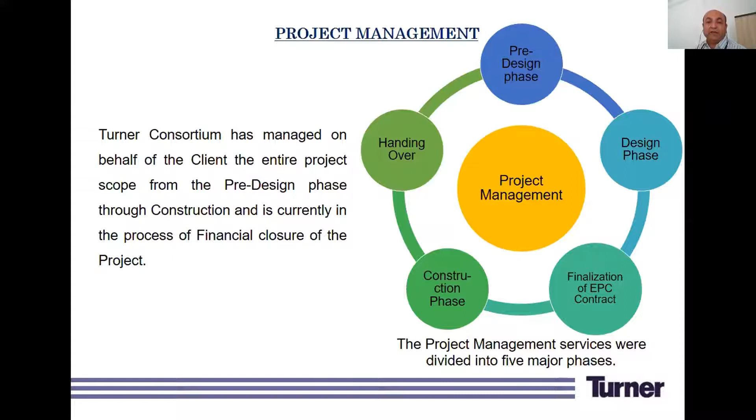Now, this was the general introduction. Let us start the discussion on Statue of Unity.

This was the stakeholders and general arrangement for the project. The government constituted a trust named Sardar Vallabhbhai Rashtriya Ekta Trust, who was the client or owner of the project. Since Sardar Sarovar Narmada Nigam Limited had a setup at Kevadia, the Trust employed them as an employer. After their employment, we worked as the engineer's representative. Turner has worked along with Michael Graves and Associate USA and Meinhardt India Private Limited.

So Turner worked in a consortium. Meinhardt specialized in services, while Michael Graves specialized in architectural design. In this consortium, Turner started this project, and after completing the tendering process, we appointed Larsen and Toubro as the contractor.

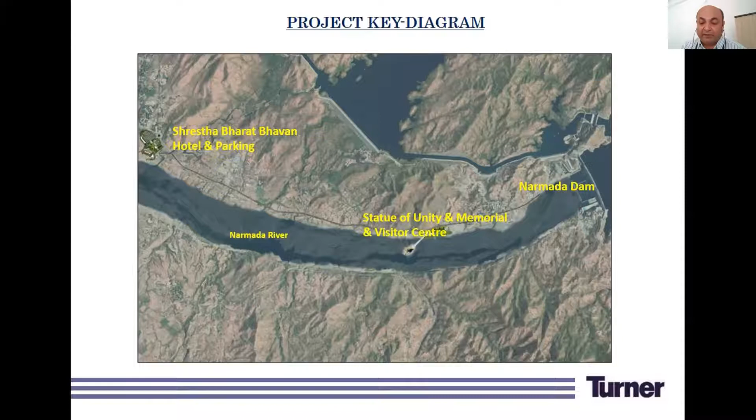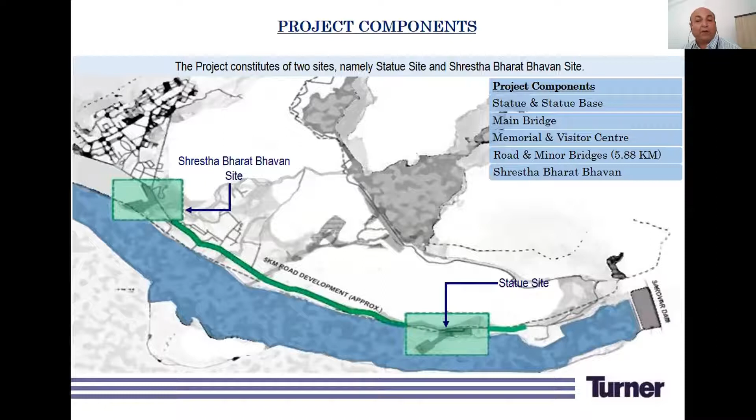This is once again the same arrangement. We have the statue base, main bridge, and memorial and visitor center at one place, and Shrestha Bharat Bhavan or hotel at another place, with a road connecting these two places being part of our scope for phase 1 construction.

The statue is 182 meters, equivalent to 597 feet tall. If we consider the levels, the deck level of the bridge is at 58 meters, the top of the museum or statue base is at 83 meters. Our podium or museum is 25 meters high, and the figure of Sardar Patel itself is 157 meters. If you total all together, that comes to 182 meters.

You will definitely love to know the history behind this 182 meters. Our current Prime Minister, who was Chief Minister at that time, Mr. Narendra Modi, decided on this figure because Gujarat has 182 constituencies. Behind this number, the number of constituencies was somewhere in our Honorable Prime Minister's mind.

To make this Statue of Unity happen, we cast bronze cladding of 21,099 square meters, which had a thickness of 8 millimeters. If you calculate the weight, that is around 1,900 metric tons of bronze used in this statue.

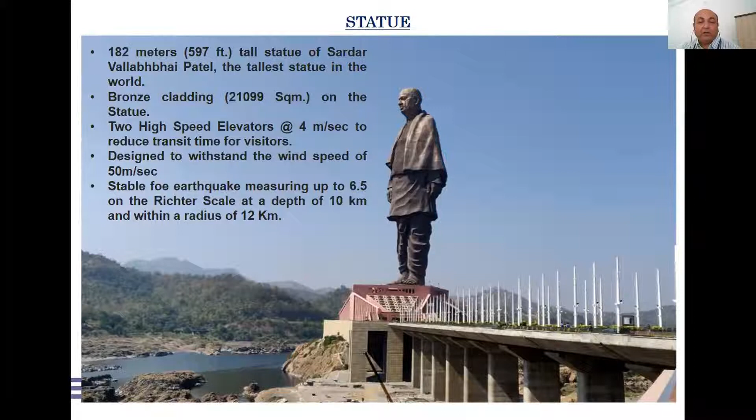Further, the Narmada river, right from Amarkantak to Bharuch, flows between two mountain ranges, one Satpura and the other Vindhyachal. Between these two ranges, we definitely feel a wind tunnel effect, so the structure design must be capable of taking a particular wind speed. I already mentioned we considered 50 meters per second wind load, but that was after we completed the wind tunnel test. RWDI, a consultant based in Canada, did the complete modeling, tested the wind tunnel effect, and suggested going for 50 meters per second wind speed. So the statue was designed at that wind speed.

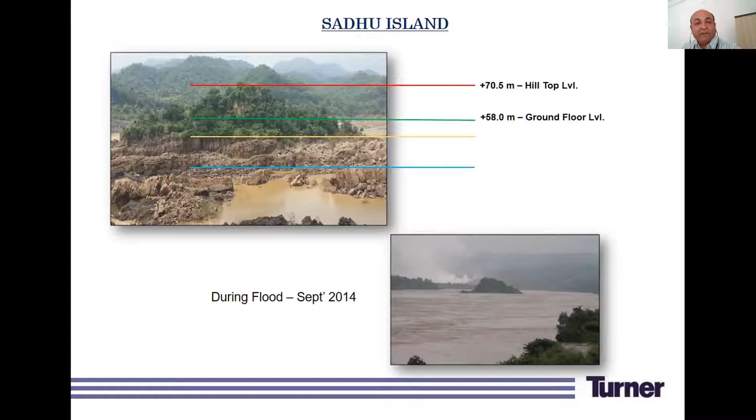Second, as seen in this photograph, in between the river we didn't have space to store material. That was another challenge, because this hillock is almost 300 meters inside the river bank, so transporting material 300 meters inside was a challenge. The second challenge was storing the material, because at that place we did not have any plain area available for storage.

Getting the required area for the museum was also a challenge, because after lowering the island from 70.5 meters to 58 meters, we got almost 62% of our area requirement. So we did huge mass concreting around the hillock and created additional area to place the museum, which is around 7,500 square meters. We created almost 2,400 to 2,500 square meters of additional area by doing CLSM, lean concrete of 0.75 MPa strength, to place the museum. That was another challenge.

As we know, this was the first project of its kind, never designed, never constructed before. So that was another challenge for us, to complete the design as per required codes and standards, keeping safety and fire hazards in mind. We took help from many consultants and experts to complete the design, review and vetting, and we did the design with their help.

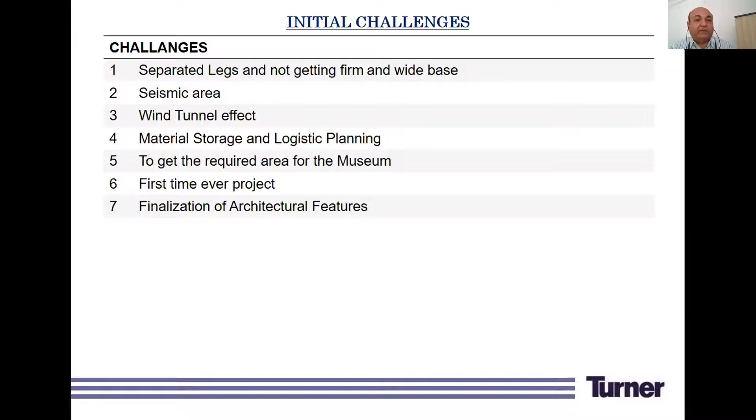A black statue is there at the Ahmedabad airport. So we decided to go with that, with a walking stance of Sardar Patel, to show a little dynamism, because Sardar Patel was a dynamic personality, and to give proper justice to his personality, we decided to go with that particular stance.

Now, to complete this, the government gave us a few governing decisions. We just discussed the walking stance. We also discussed using 8 mm thick bronze as cladding material. Based on wind force and structural calculations, our experts decided that bronze plate below 8 mm thickness would not be sufficient. So we need a minimum 8 mm thick bronze panel to withstand the wind pressure as well as structural forces. So we decided on a minimum 8 mm thick bronze as the cladding material.

Then the third decision was that international standards of foundation, structure, fire egress, vertical transportation, etc. had to be met. As I said, this project was being done for the very first time, so it was found that for some items we did not have codes or standards available in India. In that case, we decided to go with international standards, since fire egress, vertical transportation, and structural design are very important aspects of any structure. So we decided to go with international standards for this particular structure.

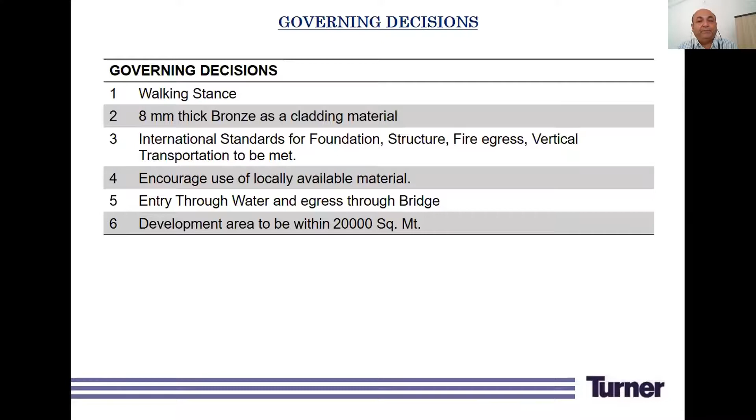Now, we designed the tender document in such a way that we asked for the contract, and asked for the help of all these consultants to be appointed by the EPC contractor, so that we would have expertise available, because this project was being done for the very first time.

We had hydrological consultant, infrastructure consultant, landscape consultant, interior designer, lighting consultant, acoustic consultant, traffic and parking design consultant, life safety consultant, specialist area calculation consultant, pedestrian movement consultant, BMU consultant, audiovisual consultant, security consultant, kitchen consultant, exhibit consultant, and wind tunnel consultant.

This 16 number of consultants we provided in the tender, and after coming on board, L&T appointed all these consultants as a minimum. Over and above this, there were also a few consultants appointed by the contractor, and we will show that at a later stage when that stage comes.

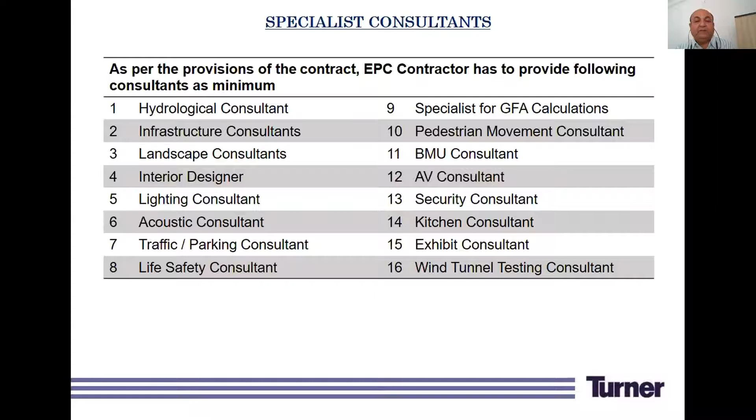First step was to finalize the statue aesthetics. So the government decided that the walking stance of Sardar Patel at an airport should be considered, and the age to be considered is around 62.

So we did a 3D scan of that particular statue to finalize the architectural features of Sardar Patel. After L&T came on board, they did the scanning of the complete statue at the International Airport, Ahmedabad, and prepared a 12-foot high fiberglass statue, which they put up for public consultation at Bardoli.

So we invited all the people, including a few who had accompanied Sardar Patel during his life. They visited Sardar Patel's place, Bardoli, saw that statue, and gave their input. After incorporating the inputs, we finalized one figure that was again scanned, and with the help of different software, we prepared a 3D model of this particular project. After that model, we also did mock-ups of some of the body parts.

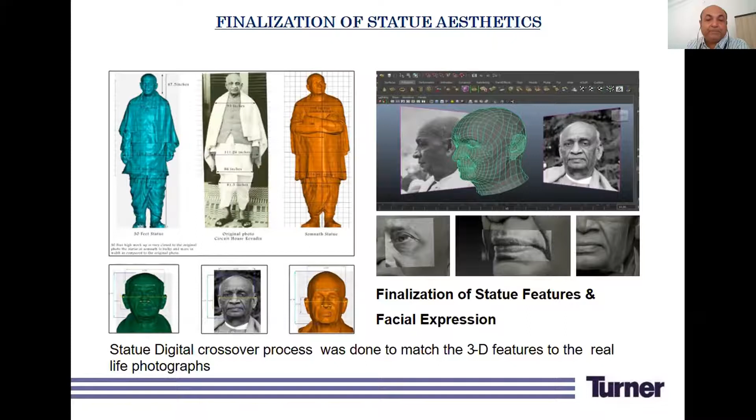This is the same which we have seen in the museum, and these are the process. From 3 foot, we have enlarged it to 18 feet. From 18 foot, it is again enlarged to 30 feet. And then from 30 feet to 1:5 scale.

A mock-up was prepared in FRP, and then it was converted into the bronze mock-up, which was brought to the site in October 2017. After taking consent from all the concerned officials of government, we finalized this as a face. And again, this face was scanned, and we did a full-scale mock-up at China, which was approved by none other than the main sculptor Ram Sutar himself.

And then it went to production, and we received the parts of the face, which was erected and completed the statue in October 2018.

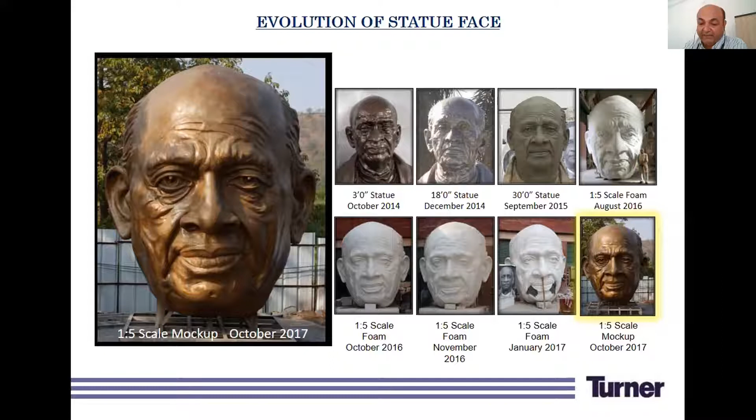Now, after completing the design, it was the work of construction, which we started on 15th of December. Our Honorable Chief Minister of that time, Anandiben Patel, started the construction of the main foundation of the statue. You can see this statue foundation is almost 4,600 cubic meter, with a dimension of 44 meter by 34 meter by 3 meter depth.

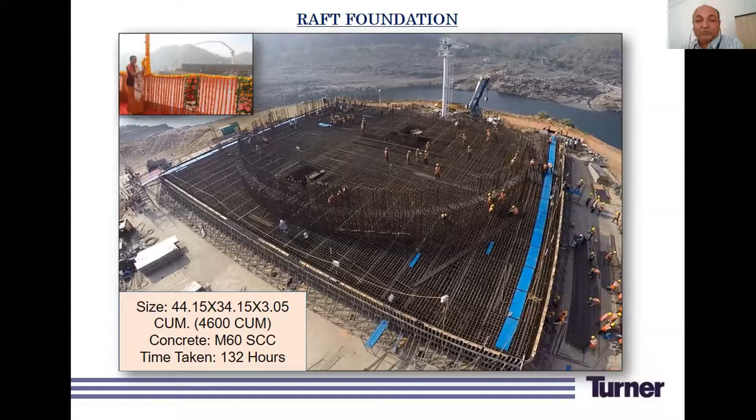At the time of starting the concrete, and even during the concreting, we continued shouting to the labor, because 3 meter depth is more than a room's depth. So we continued shouting from the top that if somebody is inside, please come out, because that foundation is huge. We took almost 132 hours to complete this massive foundation in M60 SCC.

SCC is self-compacting concrete, which doesn't need much compaction. It is a free-flowing and self-compacting concrete, which helps to reduce the voids within the concrete.

Now, after completing the foundation, we did 2 core walls. In each of the core walls, we had a lift inside, which takes you completely up to the chest level. This core wall, for structural stability purposes, is connected with coupling walls, and from the core wall we have primary and secondary steel coming out of it, joined with tertiary steel, which was welded behind the bronze plate. The bronze plates were erected and bolted with this primary and secondary steel, and we completed this complete statue.

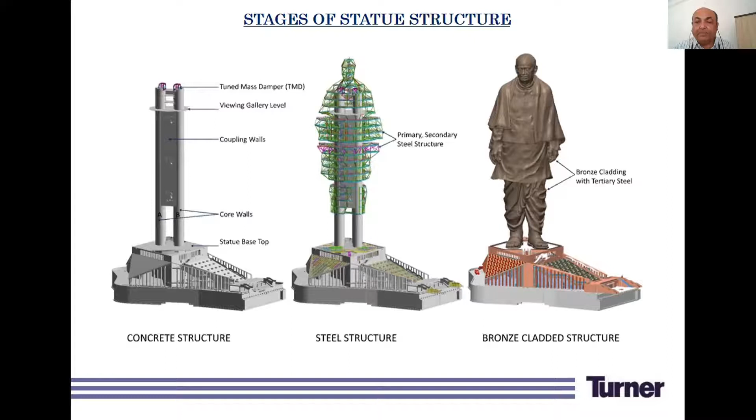As we have seen, we completed the raft of around 4,600 cubic meter. Now, if you see the core wall details, that is also a very huge structure. The core wall is 153 meter high, 11.3 meter by 8.4 meter elliptical section, and the thickness is 1.3 meter.

You will be surprised to see that we casted it in 4 meter high lifts. Every 4 meter piece of this core wall had 92 metric ton of reinforcement steel, as well as 165 cubic meter of concrete, and we started with a cycle of almost 45 days per lift, which was reduced down to 7 days per lift at the end.

So this was one of our biggest challenges to complete this core wall. Total reinforcement of this core wall is 4,620 metric ton, and to join the primary and secondary steel, we had insert plates within the core wall, which total 280 metric ton, and total concrete of this particular core wall is 13,500 cubic meter.

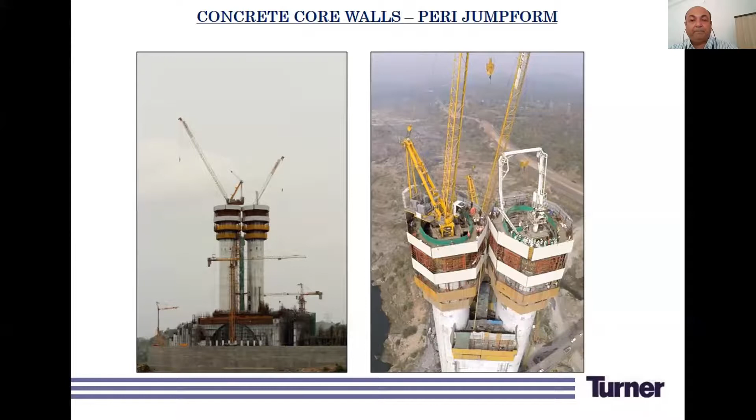Now this is a plan of the statue. We have a vertical and horizontal transport system. As you go towards the statue, we have a total of 8 travelators on the main bridge, which is an exterior type travelator. Once you enter the statue area, we have escalators through which we can go up to the feet. We have 10 escalators, 5 on each side, from 58 meter level to 83 meter level, with a capacity of 9,000 persons per hour.

So this vertical and horizontal transportation system is also there, but it will be utilized only after construction. During construction, we also utilized vertical and horizontal transportation, because without vertical transportation we cannot move labor and material up. So we also used passenger hoists to take the labor and materials up and to complete the work within the required time.

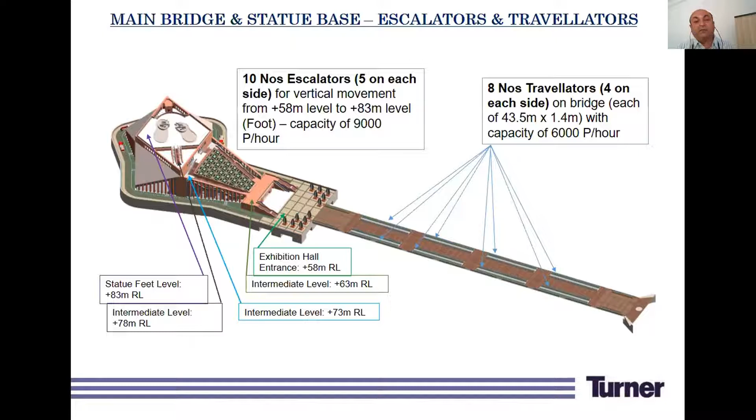As we have discussed, we have designed this statue for 50 meters per second of wind load. If we make the statue stiff, then it will be a structural issue against 50 meters per second of wind load. So we have to allow a free sway of the statue. Otherwise there will be an issue with the structure, there will be cracking within the structure.

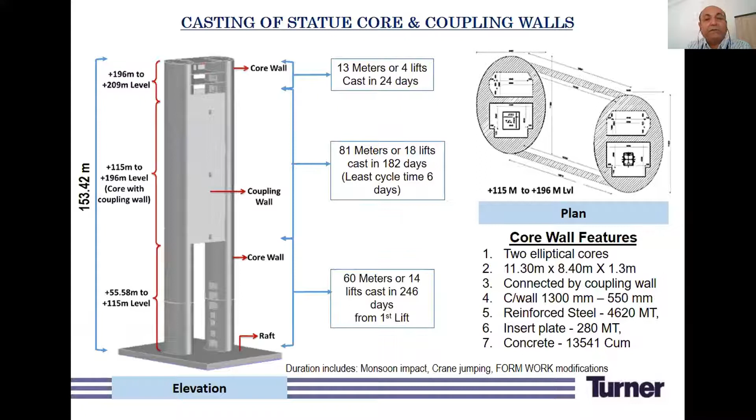So we have allowed 1 meter sway of the core wall, a free sway. And to control this sway movement, we have installed a tune mass damper which will control the sway to 1 meter and will not allow more than 1 meter sway. If you see the core walls here, from 196 meter to 209 meter, we have freestanding core walls wherein we have placed this particular tune mass damper. We have used 2 dampers per TMD, and a 200-ton mass hanging from the frame has been used to control this sway well below 1 meter.

And we have a structural housing, a structural steel housing, to hang this particular tune mass damper. The photograph shows the bottom slab of the 196 meter level, and the frames we have placed for hanging the tune mass damper.

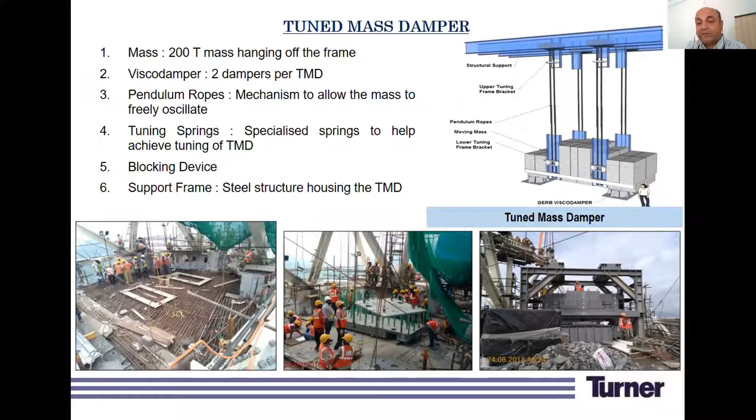Now while construction, it was very important for us to do the site management and site logistics. Without proper logistics we cannot complete the construction work. As we all know, this was constructed well in the riverbed. So we constructed a temporary bridge across the river from mainland to the island to transport material, machineries, and for labor transportation, plus for construction of the main bridge which we are using right now.

We created a storage area below that bridge so that we could do some construction work during the dry season, and we used that particular area for storage and construction material. We even cast the girders of the bridge within the riverbed, and that area was well utilized.

Now we have divided the statue base into a total of 5 zones, and zone 5 and zone 3A, which are just next to this temporary Bailey Bridge, we converted into temporary yards to store the panels which are coming from the assembly yard.

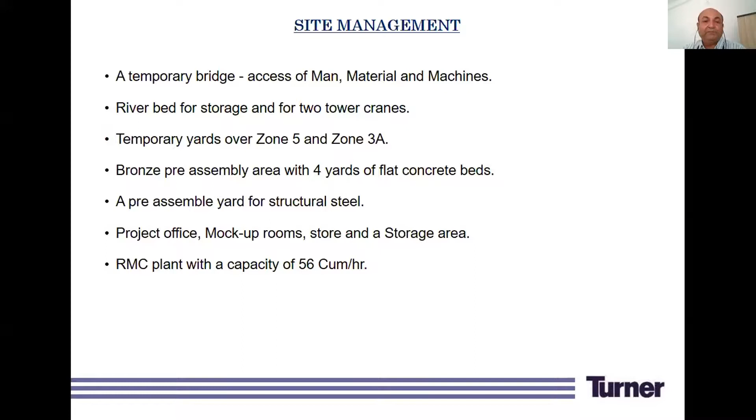This is the key plan of the entire area. You can see the statue is connected with the main bridge. On the bank of the river, we have a Memorial and Visitor Center. Just next to the Memorial and Visitor Center, we had a site office, and the temporary Bailey Bridge is also there.

The bridge connecting to the statue area is zone 5, which we used for temporary storage of the structural steel. Further left of that Bailey Bridge, we had a permanent site office plus batching plant plus assembly yards. All the infrastructure was created in this remote area, and we completed this construction within the stipulated time period.

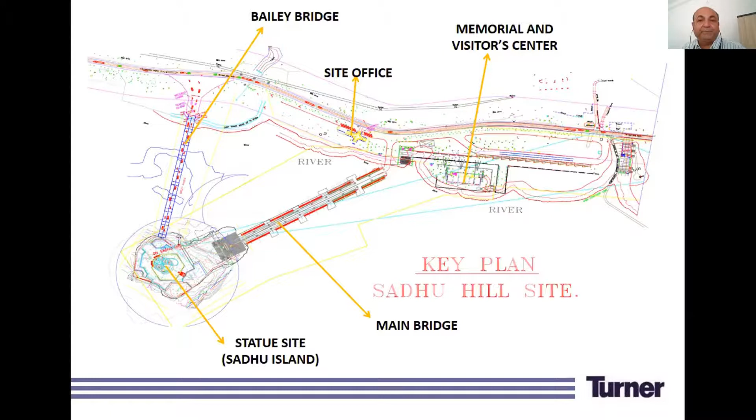Now, if you see the detail, the Bailey Bridge is a 225-meter long temporary bridge which we constructed across the river Narmada up to Sadhu Island. This bridge has 9 spans of 25 meters each.

This bridge was for the transportation of men and machinery. While doing the statue's main foundation, we laid a concrete pipe along the bridge, and we pumped the concrete from the outer end of the bridge and poured it within the foundation. So utilization of this bridge started from day one itself.

Because it's a steel bridge, for safety purposes, if the vehicle is below 30 ton, we allowed a speed limit of 10 kilometers per hour. If it is between 30 to 100 metric ton, we restricted the speed limit up to 5 kilometers per hour. And this is not just on paper—we put up special people to check and control these speed limits. So at site, we did all the things required for the safety of this Bailey Bridge.

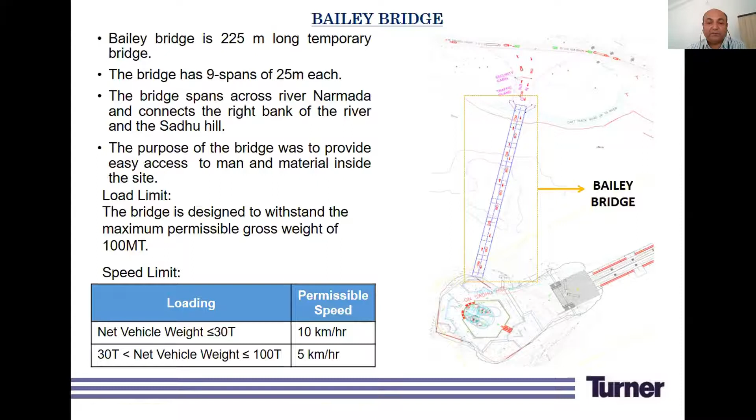We discussed regarding the vertical transportation. Now this is the vertical transportation arrangement: one luffing crane outside the statue, one luffing crane within the statue, one crane outside the statue area, and one placer boom was utilized to construct this particular statue.

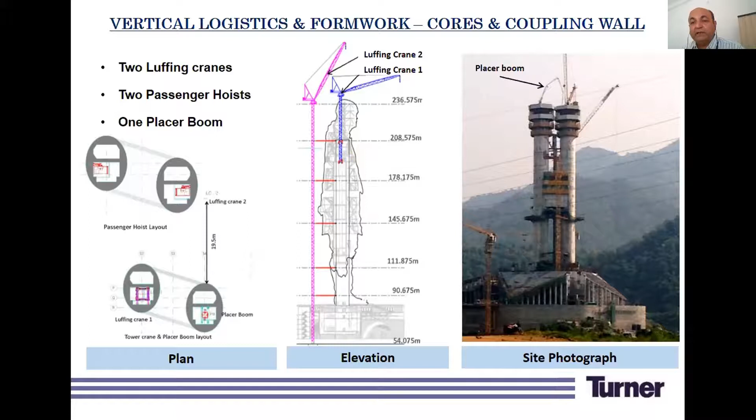Since this is a vertical expansion only and no horizontal expansion, managing vertical transportation was most important. We also had 2 passenger hoists, one each in 2 cores, to shift material and take laborers up and down. For concreting purposes, we had a placer boom placed within the core to transport and pour concrete in these two core walls.

These are the positions of different cranes and their capacities. LC1 had a capacity of 20 metric ton, which was inside core A. LC2 had a 16-metric-ton capacity, which was outside the core.

LC3, which we inserted at a later stage, had a capacity of 8 metric ton, and it was a cantilever. This was the biggest challenge for us, because a crane itself needs a solid foundation, and we adjusted and put it up as a cantilever. So the crane itself was a cantilever, taking 8 metric ton of load—certainly a new thing for civil engineering.

We also had a derrick, which was 8 metric ton capacity, and it was above the core.

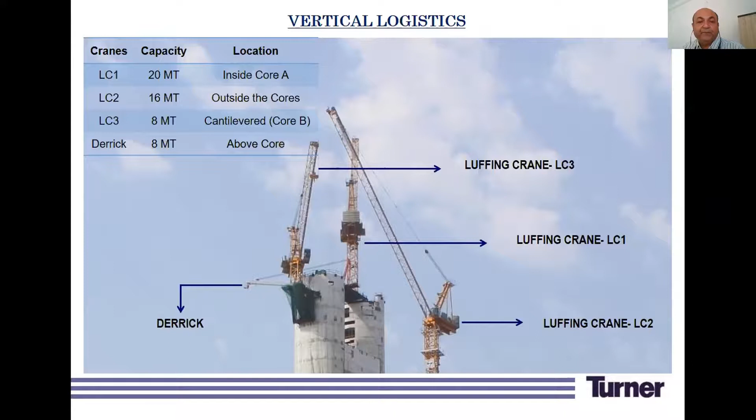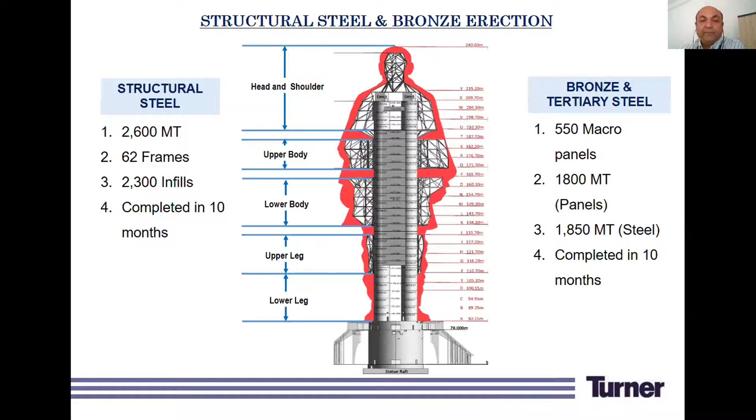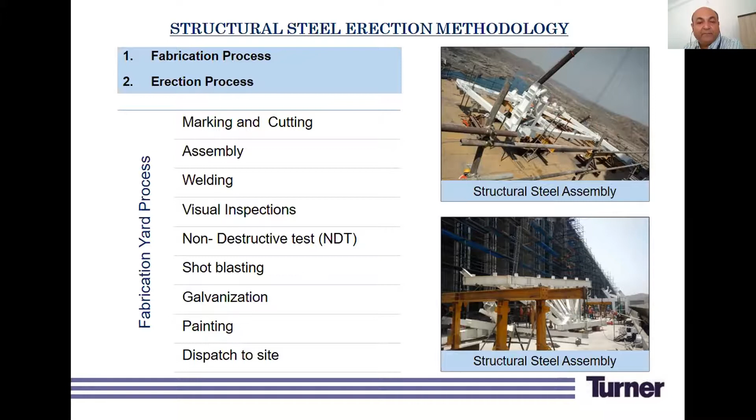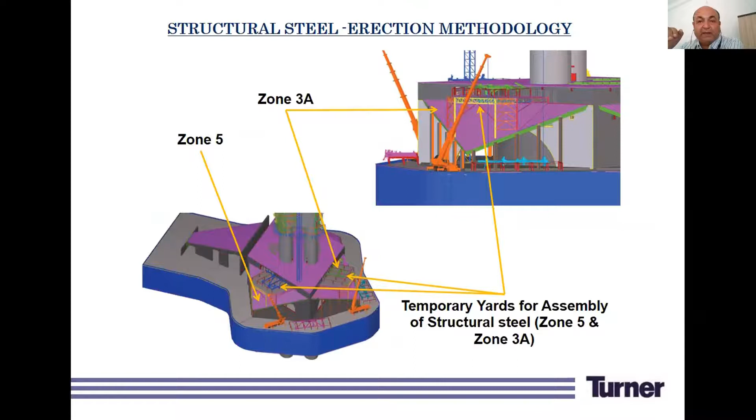On the core wall, we did stub welding with the insert plate of the core wall, and from that stub we bolted the primary steel—62 frames of primary steel, which had the secondary steel infills.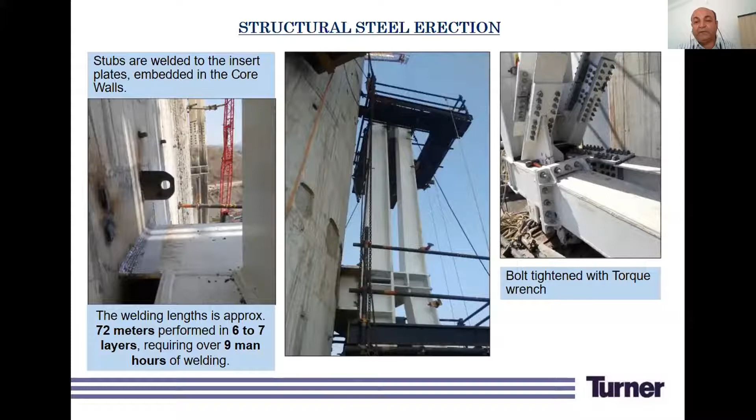Parallel with the structural steel fabrication, we did the pre-assembly work of each and every level at the yard. We had 4 yards at the site for pre-assembly of the complete level for that particular area, and then we dismantled it back into micro panels, made it into macro panels, and transported it onto the site.

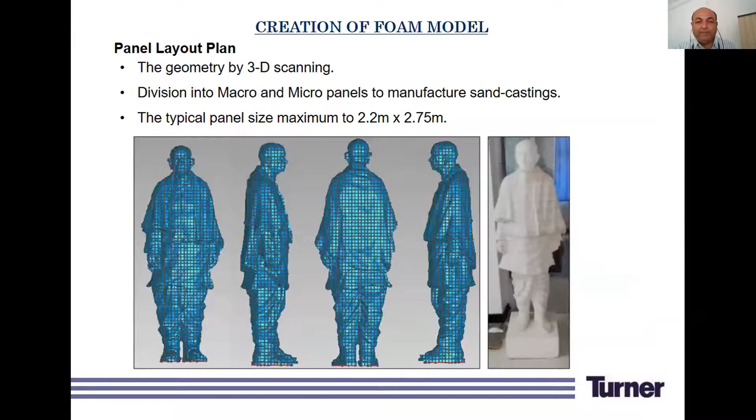Now, the first important point which we did is grid marking on the ground. Based on the profile of the level, we have done the complete grid marking on the ground. And after doing the grid marking, we have placed the tools across that grid marking.

Now the copper welding is known as brazing, and we have brought special welders from China who have done this welding work at the required speed to complete this project.

After doing this, we have done the shot blasting, sand blasting over the bronze panel and each and every macro panel. After completing this, we have dismantled this complete level into macro panels.

One micro panel was 2.2 x 2.75 meter area, whereas the macro panel was an assembly of 3, 4, 5 to 6 micro panels as per the requirement.

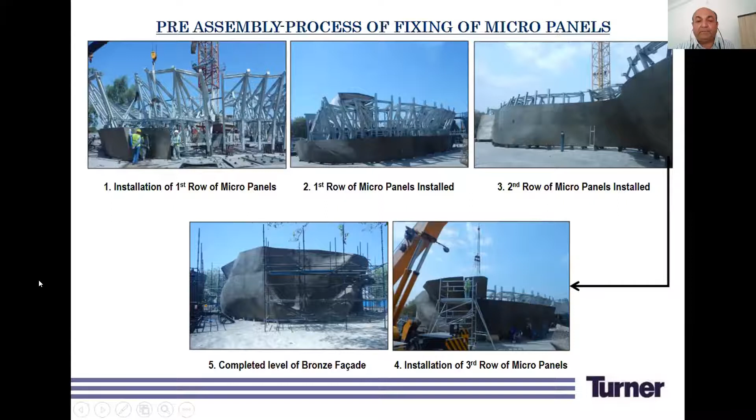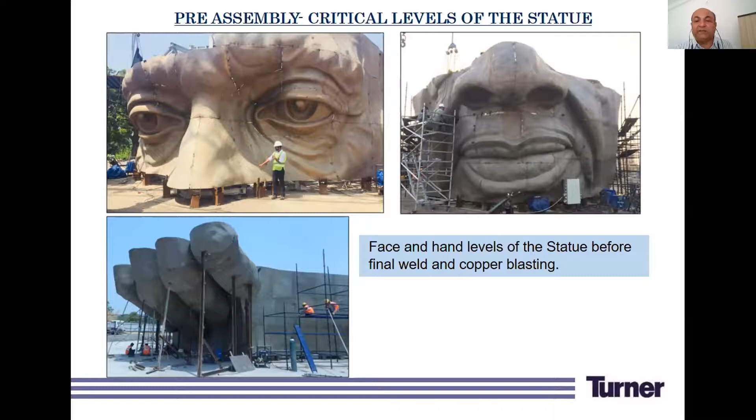As you can see here, copper blasting is also done, and after the copper blasting, we have done the surface cleaning. The surface, which was initially a little bit reflective, became completely non-reflective after the copper blasting.

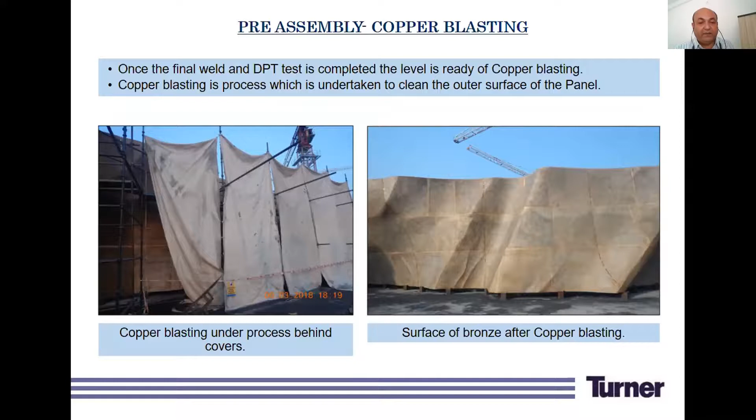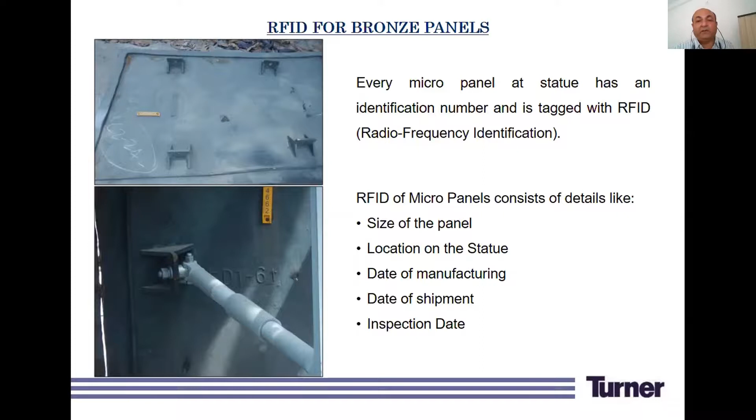After completing the erection, on each and every panel we have kept an RFID, radio frequency identification. You can see this yellow strip, which is the RFID, which will show the size of the micro panel, where it is located on the statue, what was the date of manufacturing, date of shipment, when it was inspected, what is the laboratory test report done in China, and what is the laboratory test report done in India. So each and every piece of information is stored in that particular radio frequency identification strip.

Now, when the discussion comes to this panel casting, we have done the panel casting in China because this big foundry is not available in India who can do the speedy work.

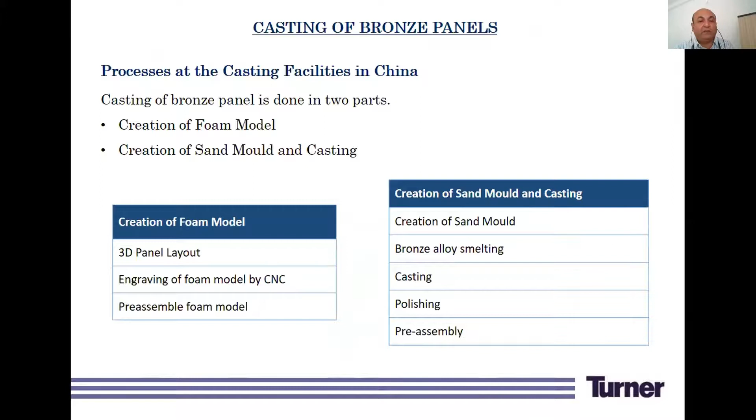Through vents, we have poured the melted metal into the sand so that the required shape and size of the bronze panel can be manufactured. After manufacturing the particular panel, it was assembled there, it was tested there, and after completing the quality testing, it was shipped to India.

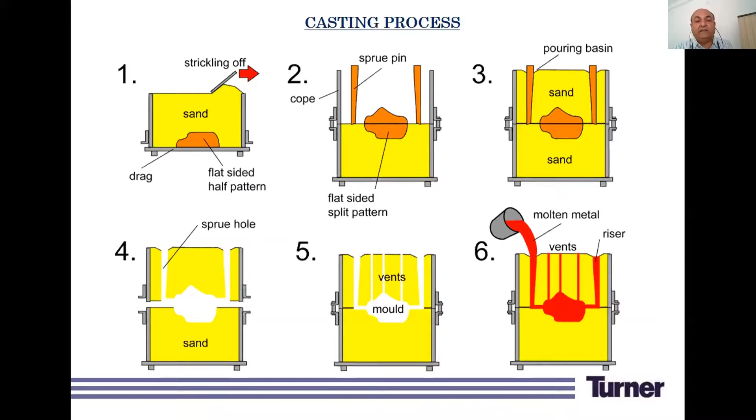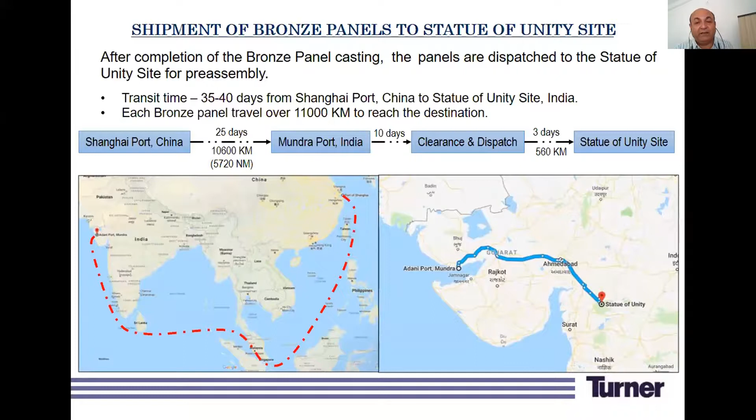So the transit time was 35 to 40 days from Shanghai to Statue of Unity, and each and every panel traveled 11,000 kilometers to reach the destination.

After completing this, transportation was also one of the biggest challenges because of the restriction of road width and restriction of placement area at the site. The weight of each macro panel was around 6 to 7 metric tons.

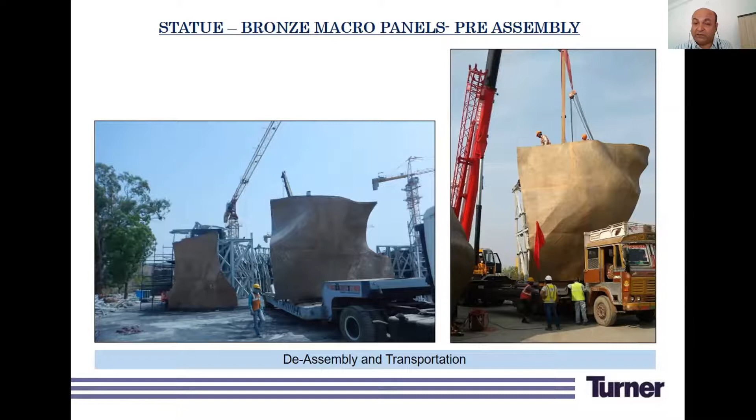Storage and particularly transportation was also a challenge, and we have used big trailers and big cranes, with safety persons walking alongside these panels to safeguard the other people, as well as to safeguard these particular panels. The safety people have contributed the most on this project.

We have almost completed the structural steel erection, and almost 40% of bronze work was completed. In September 18, we completed the structural steel plus almost 70% of bronze work. In October 18, we completed the statue.

But after completion, it was still not complete. As you can see, the tower crane was behind the statue. Removing the tower crane was also one of the challenges, because removal is not the only important thing. The tower crane was tied with the core wall within the statue. So once you remove the tower crane...

Then at the same time you have to plug that hole also. So if you lower the tower crane, you cannot reach the hole, and without removing that particular support, you cannot fix the particular panel either. So that was also a challenge.

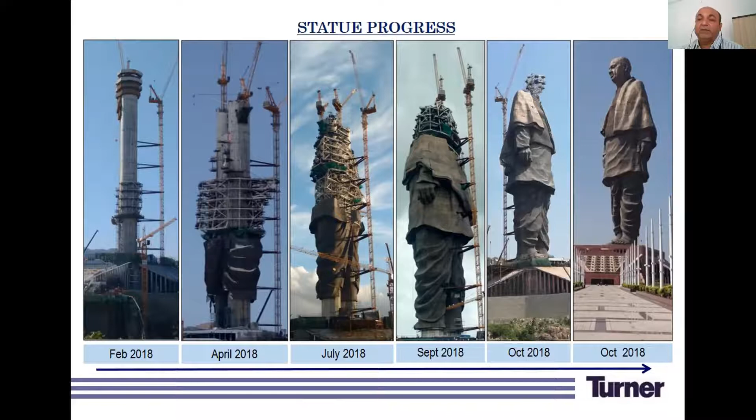So with the help of another tower crane at the site, we completed the erection and removed that tower crane. And on 31st October 2018, it was ready for the inauguration by our Honorable Prime Minister.

One more important feature of this statue is the patina effect. Since copper is a main component of this statue, copper with oxidation will change color. So from metallic bronze right now, it will turn greenish like the Statue of Liberty after 100 years. This color transformation is known as the patina effect.

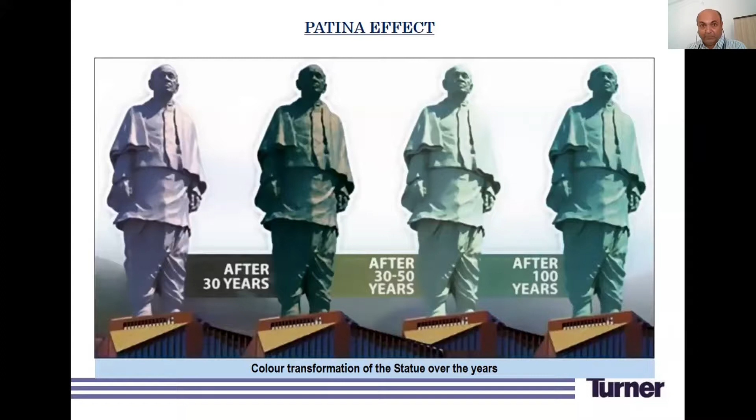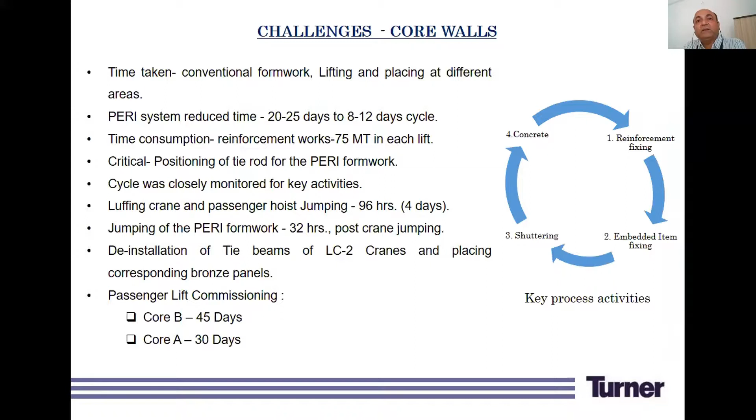Now, these are the major consultants L&T appointed to help in this project. Ram Sutar was the sculptor. DPA Lighting UK was the lighting consultant. HR Wallingford UK was the hydrological and maritime consultant.

Woods Bagot from USA was the architect and interior designer. Arup, United Kingdom and Hong Kong, was the structural consultant. EDRC of L&T was the structural consultant for structures other than the statue. RWDI was the wind tunnel consultant. HCP Design Ahmedabad was the landscape consultant.

Arup again was the cladding consultant. Tata Elxsi was the signage consultant, and Lord Cultural Resources was the exhibit consultant for this project, appointed by the contractor. As Turner consortium, we also appointed PricewaterhouseCoopers as a sub-consultant for their commercial and financial studies of the statue, which we submitted to the client, the government of Gujarat, based on which the government has done all the recent development around the statue.

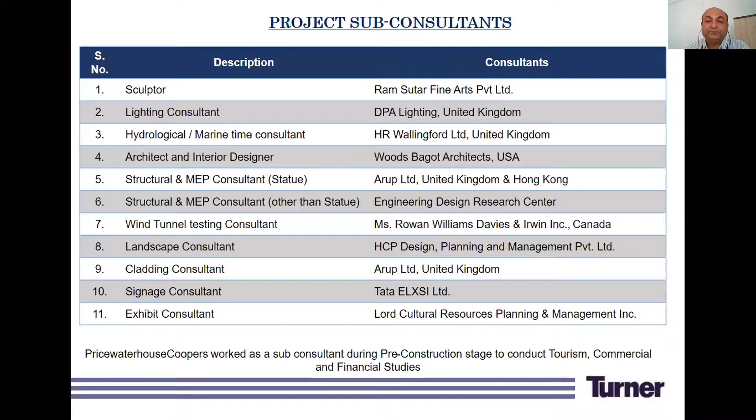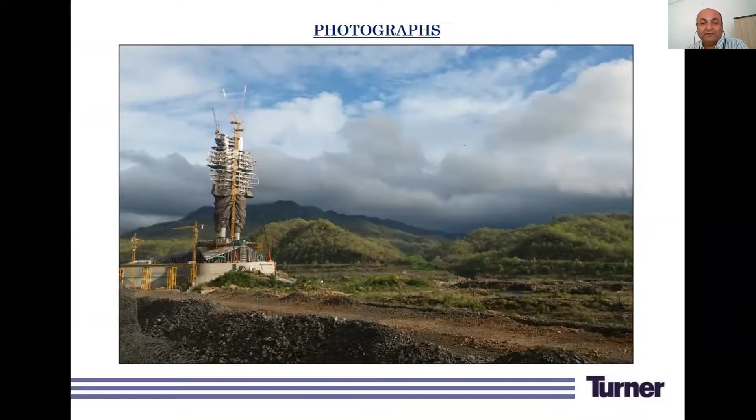These are some photographs of the statue we took during construction. So we will definitely see them before closing this presentation. Thank you all.